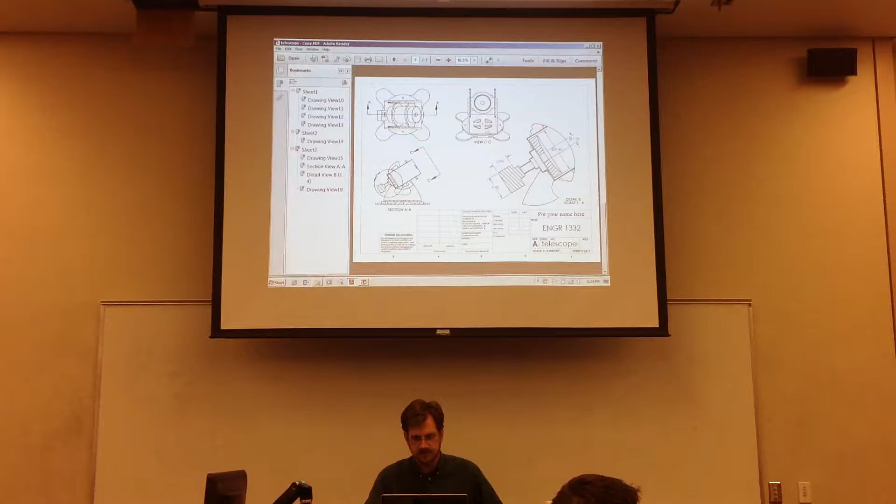So some of this is similar to what we did last week or a couple weeks ago. A couple things here are new. So we'll show you the steps that you need to create this drawing.

Okay, so then you're also going to create 2 different configurations of this assembly in one assembly file. Okay, one of them for direct viewing, the other one using a Canon camera. We'll talk more about that. Then we're going to adjust the parts as necessary to let the camera mount version pivot a full 360 degrees without interfering with the base plate.

And then we're going to save the assembly as a part file. Okay? So you're used to saving the assembly file, but we're going to show you how to take this assembly and save it as a single individual part file, an SLDPRT file. And then finally, we'll take that part file and save it as an STL file, which is the kind of file that you use with the 3D printers. So you could actually go and print this if you wanted to.

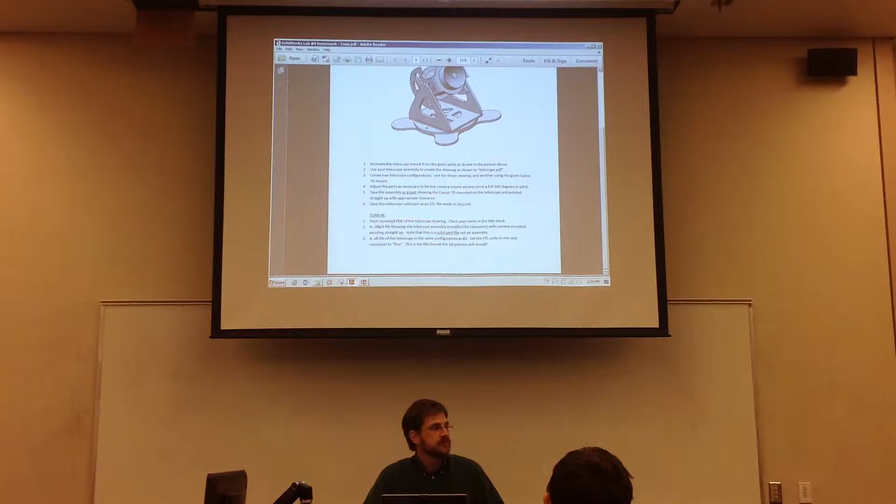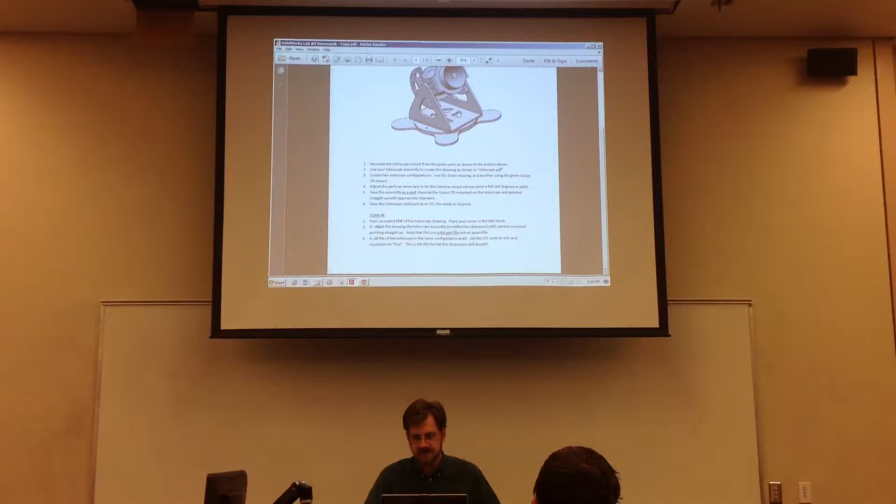So what you'll turn in is 3 files. One of them is going to be your PDF of the drawing. Then you're going to turn in your SLDPRT file, where you save this assembly as one single part. Okay? Again, note that this is a solid part file, not an assembly file. And then finally, you're going to turn in your STL file, which is the format that the 3D printers accept.

So with today's class, you'll know everything that you need to know in order to go actually start using 3D printers and taking your models, sending them to the printer. Okay, so that's an overview of what you're going to be doing this week. And I went ahead and put the assembly together since there's nothing new there. I don't want to waste your time watching me do these operations that you already know how to make. So let's just open this up.

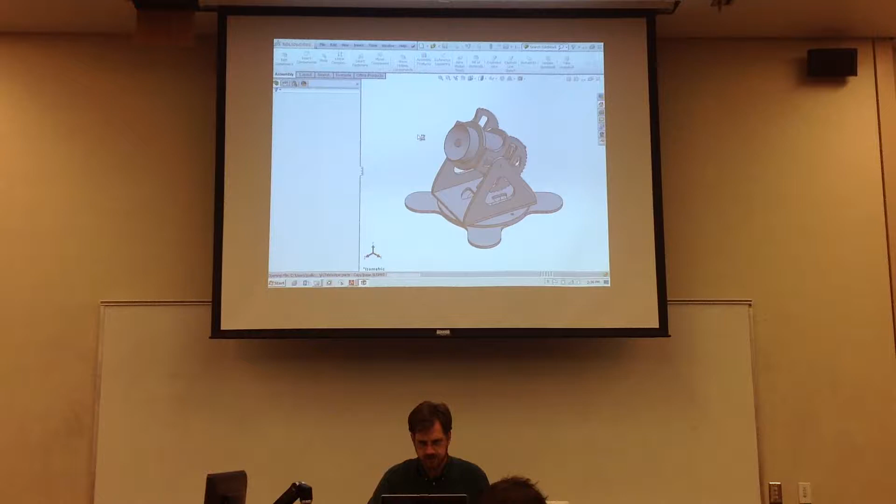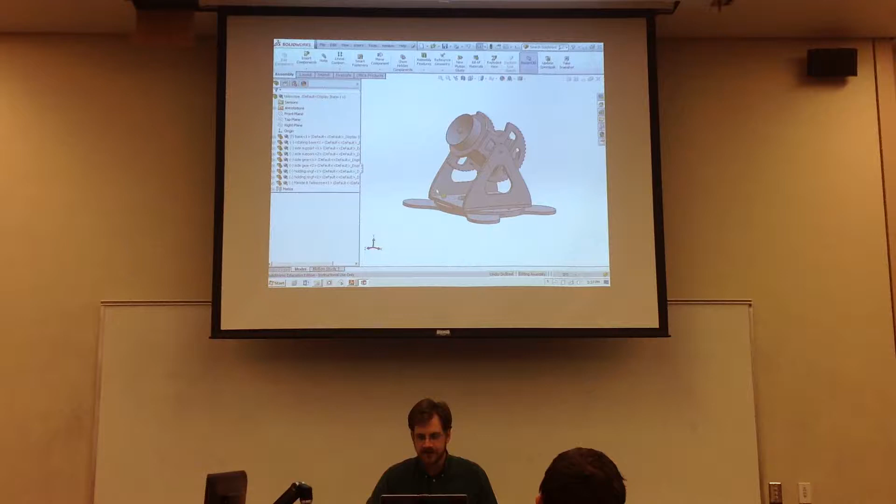Okay, so here's the telescope. And when you've got it all put together, it should be able to rotate like that. So you can rotate around to point it in different directions. And also, if I temporarily fix that rotation, you should also be able to pivot it up and down to change the angle at which it's looking.

So now if I look at, say, a top view, what I want to do is have this rotation oriented in a way that it's going to be kind of facing straight down. So that if I looked at the right side view, it would be just, I'd be looking straight at the side. I don't want it rotated at some odd angle.

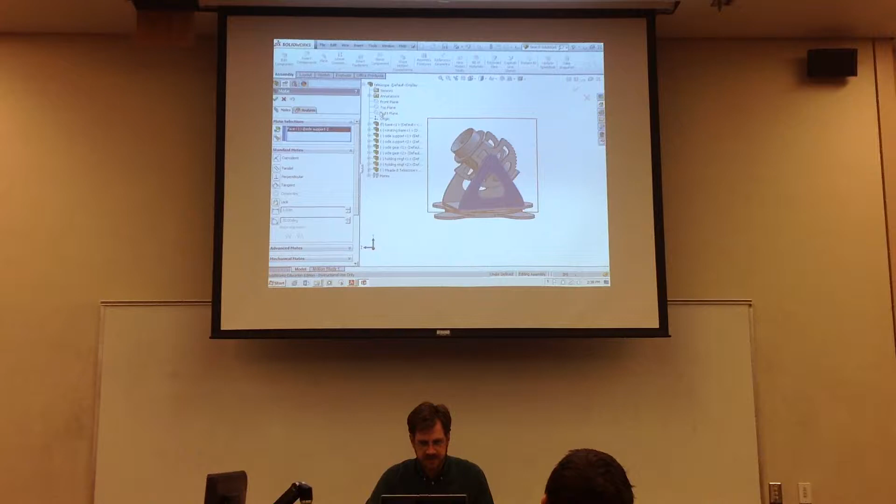So the easiest way to make that happen is to go ahead and simply mate one of these side plates to be parallel with the right datum plane. So we can go to mate, choose the side plate, choose the right datum plane. They don't need to be coincident, they just need to be parallel. Okay?

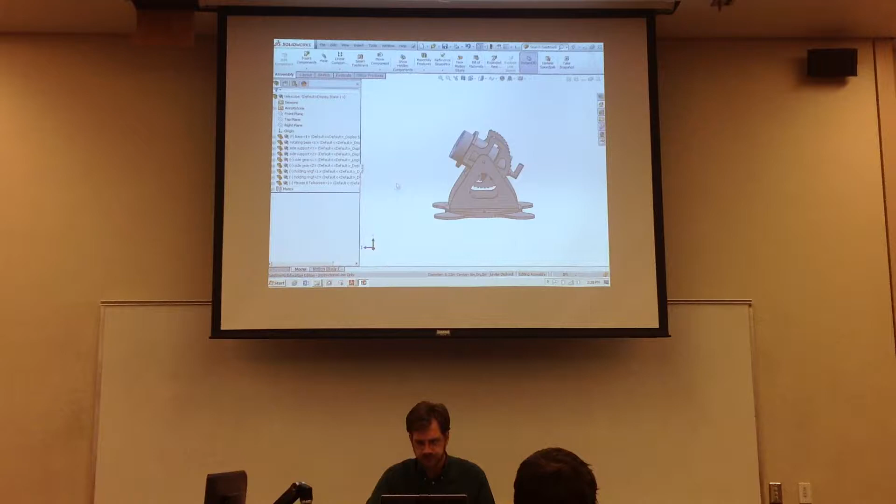Okay, so this is the direct view version of the telescope. So this little eyepiece, you put your eyeball right here, you look through the telescope. The light coming in reflects off of this main mirror at the back, reflects back to this secondary mirror at the front, and then reflects off of that, goes through some lenses of the eyepiece, and comes up here to where you're looking in through the eyepiece.

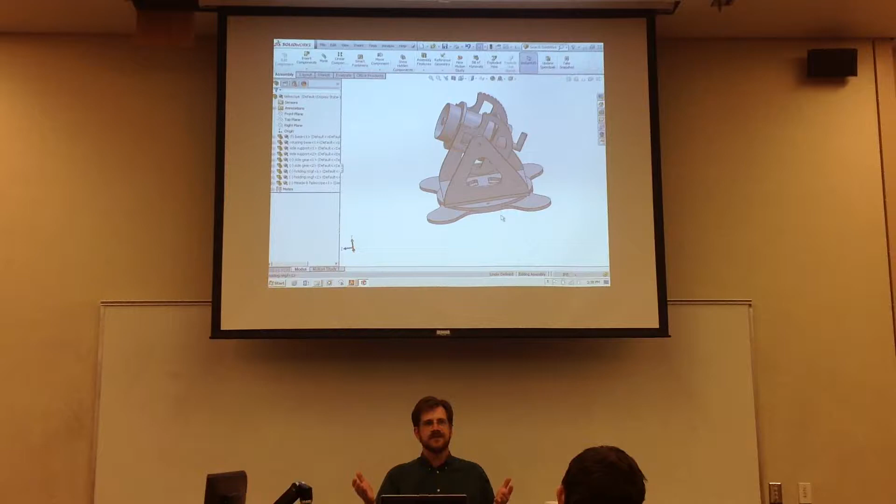Okay, so one of the things you saw in the drawing was that we're going to create an exploded view of this telescope, where all the parts are separated. You know, you've seen these lots of times. Anytime you buy something that you have to put together yourself, they usually give you an exploded view to show the locations and... actually define that exploded view as a configuration in the assembly model. So we need to do that before we create the drawing.

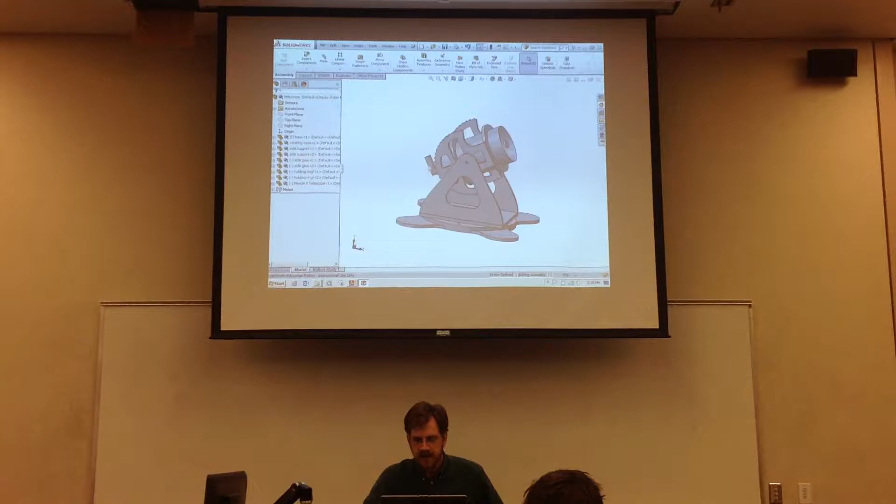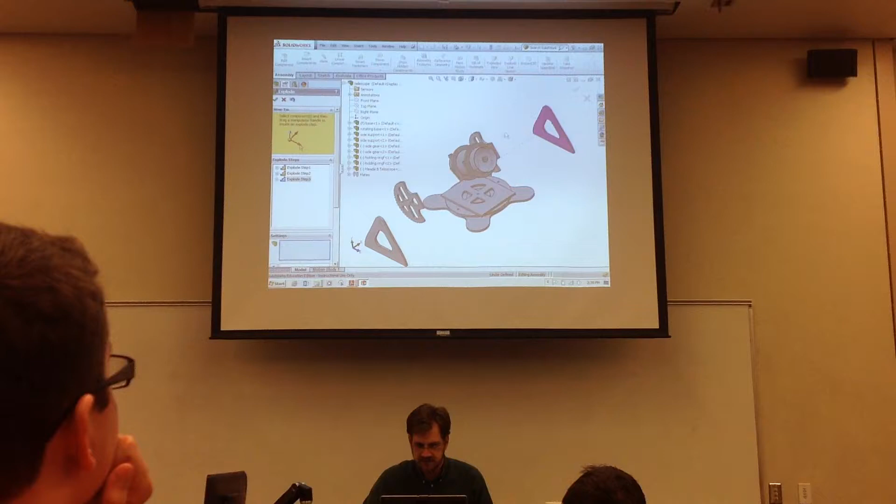Defining an exploded view is actually pretty easy. On the assembly tab, you've got a button right here for creating an exploded view. You just click that button, and then you can click on a component in your model, and a triad, these three handles will pop up, and you can click on any one of these handles and simply drag the component in that direction. So for example, I can click on that red handle and drag the side plate out to the side. Then I click on the gear and slide it out to the side, do the back side plate, side gear. So this is very straightforward.

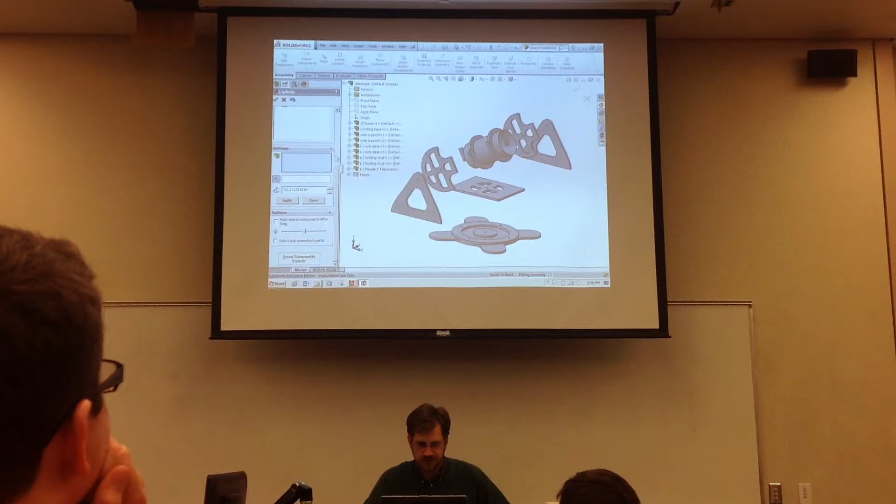We can drag components vertically as well. Drag that down. And you'll see each time I drag a component, it's defining that motion using an explode step here. If you wanted to get really precise, you can put in precise distances right down here, but usually, for our purposes, it's good enough to just position things, make them look good by dragging them on the screen.

Now, if we wanted to drag one of these holding rings, suppose we want to drag it along the axis of the telescope. That's the direction that makes the most sense, but none of our triad arrows are lined up in the correct direction. What you can do is right-click on that blue dot in the center of the triad and say Align To, and then you can click on some other surface and the triad will rotate to be normal to that surface. So now we've got a handle oriented just in the right direction.

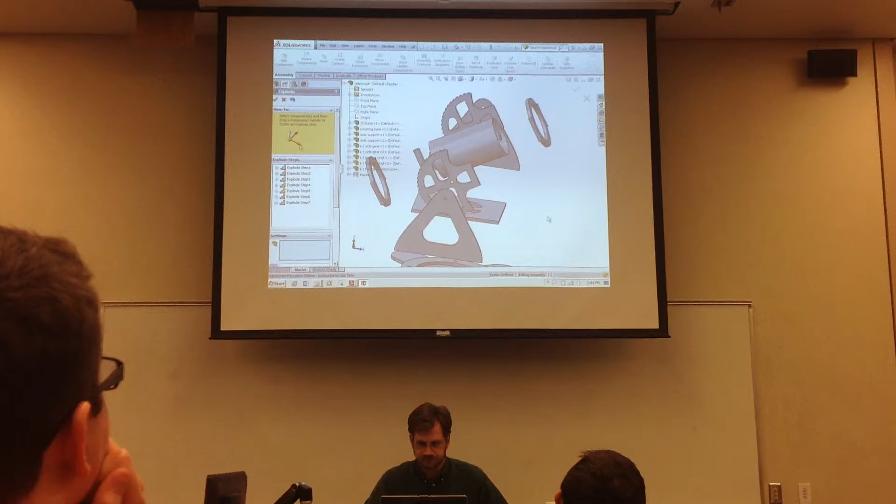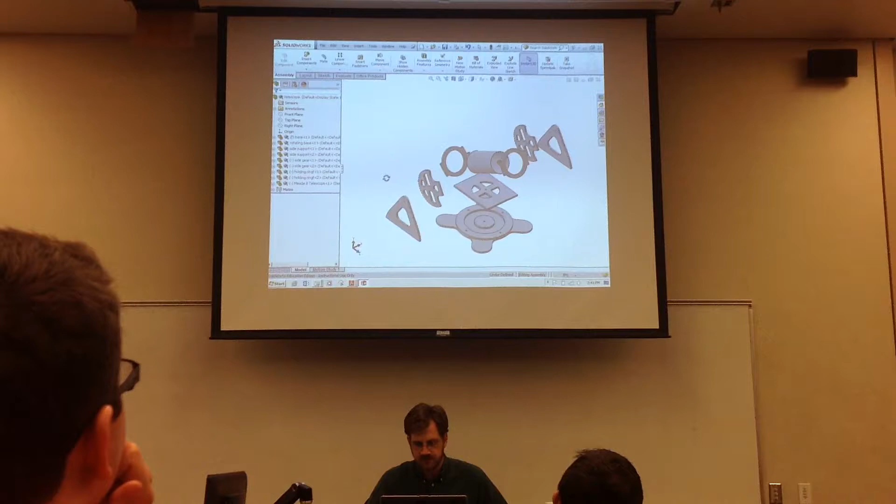We'll do the same thing on this back holding ring. Click on it, right-click on the blue dot of the triad, say Align To, and then click the front face of that surface. That rotates the triad, and we can drag that back. Okay. So once you get the components positioned the way you like, just go ahead and click the check mark, and you've now defined the exploded view of your assembly. That exploded view is saved on the Configuration Manager tab.

Okay, we've spent most of our time looking at the Feature Manager here, but notice there are 4 different tabs. We've got the Property Manager here, which we've seen, sometimes an Appearances Manager, but this third tab is called the Configuration Manager. And if we expand the default view, this is where that exploded view resides that I just created. So if we want to put the pieces back together, all we have to do is right-click on Explode View 1 and say Collapse. And it's back to the fully assembled version. If I want to explode it again, just right-click and say Explode.

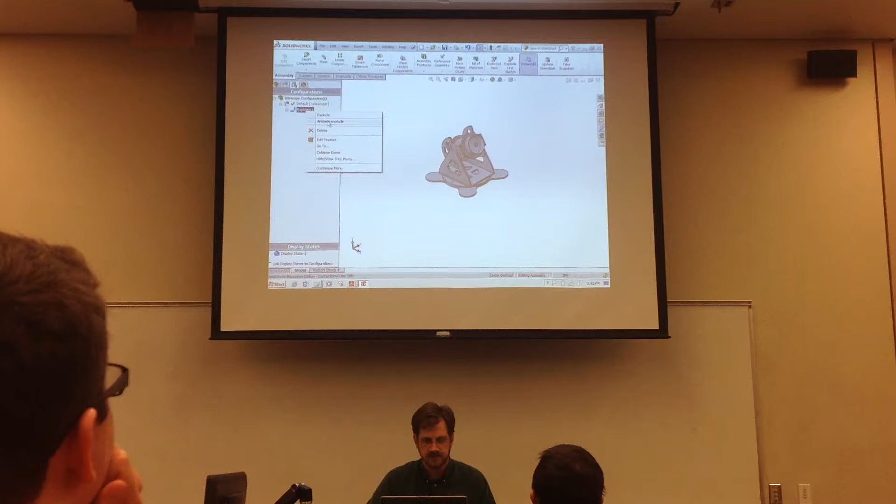Another thing that's kind of neat here is, if you right-click, you can animate the explode steps that you define. So click Animate Explode, and it will do those steps in the same order that you created them, and you could even save that as an AVI file or a movie file. You could put that into PowerPoint if you wanted to see your assembly being taken apart. It's just a movie file, completely independent of SolidWorks.

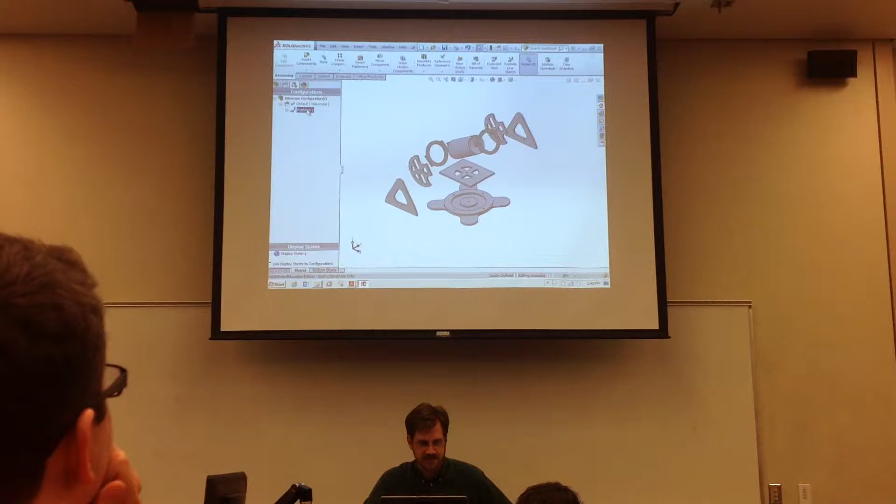You can also animate the collapse process if you wanted to show how it goes together. Just right-click and say Animate Collapse, and you can see all the parts going together. And again, just use the little Save button if you want to save that movie file.

Okay, so do you have any questions about defining the exploded view or anything we've done so far? I'm a little confused about what we were turning in. You said that we were turning it in as just a part file. Mm-hmm. So does that mean that we're going to take our assembly and just save that as one part? Right, and I'm going to show you exactly how to do that. Okay. But yeah, that's what you are doing. Any other questions?

Okay, while we're on the Configurations tab, this is a good time to talk about creating multiple different configurations of your assembly. A lot of times we might want to show our assembly in different states of operation, like if you're modeling an airplane, you might want to show it with gear up and gear down, or flaps up, flaps down.

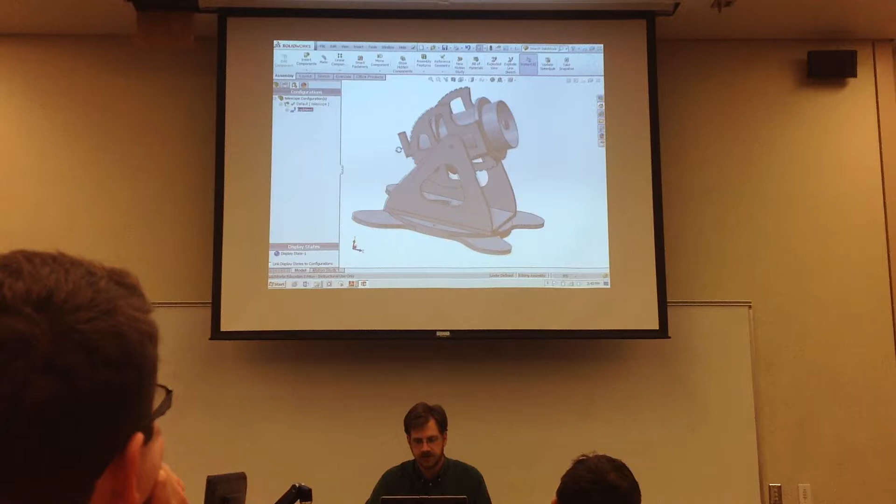You don't want to save a different assembly file for every one of these different configurations. We can create multiple configurations and save them all in one assembly file. To illustrate this, we're going to replace this direct view telescope with a different version of this part that has a little box on the back representing a Canon camera. So that'll be our camera view telescope.

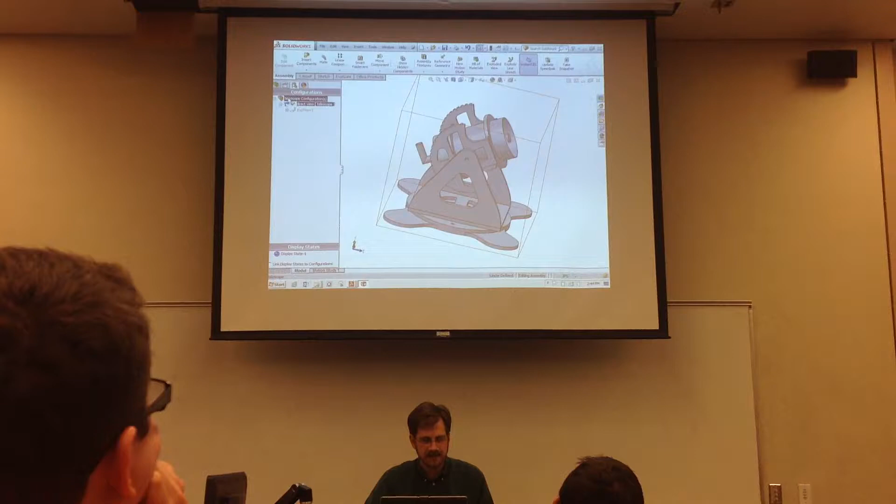The configuration we first defined is just called default, but let's call it something more meaningful. Let's rename that and call it direct view. To create a new configuration, I right click on the top level assembly and say add configuration. I can give it a name. I'm going to call this one camera view.

There are a few other options you can look at, but I'm just going to accept the default options as far as defining the configuration. Now I put this assembly into the state it should have for the camera view configuration. So I'm going to insert another component that you are provided on D2L.

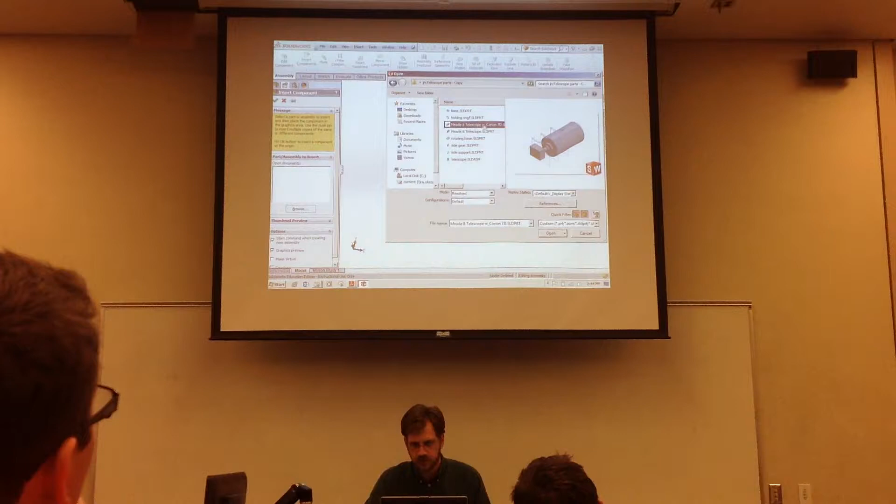It is the telescope with Canon part. So open that and place it in the assembly. What I want to do is replace this direct view telescope with this Canon camera telescope.

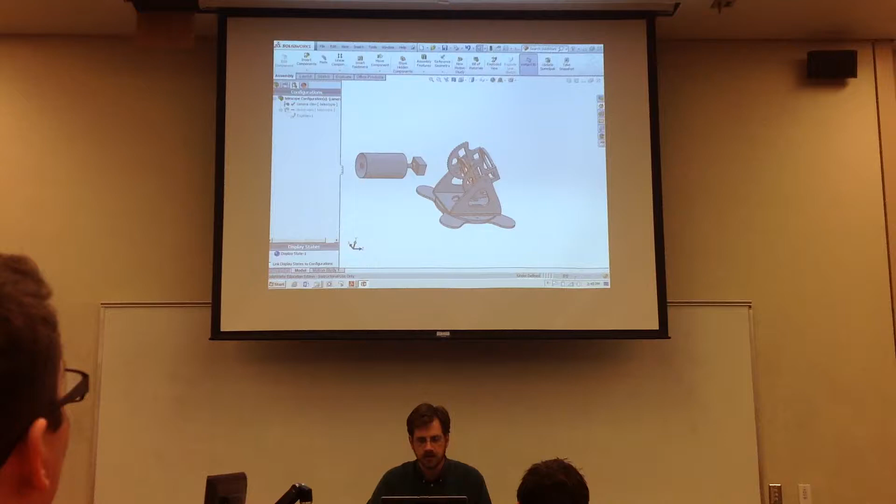I don't want to delete the original telescope though, because I still want that available for the other configuration. So instead of deleting it, you right click on it and simply say suppress. It hides it, but it's still in the model and all of its mates are still valid. If we go back to the feature manager, you can see anything you've suppressed will be grayed out like that, but you can always right click on it and unsuppress it to bring it right back into your assembly.

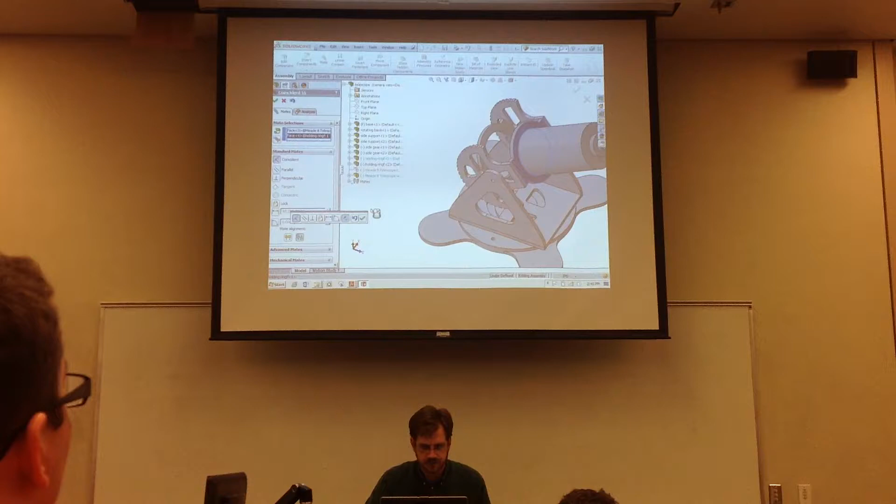So let's suppress that guy and then make this telescope into the proper position. We'll mate that surface with the inside surface of the holding ring, then do an offset from the front surface of the telescope to that front surface. Offset it by 3 inches, and flip the alignment.

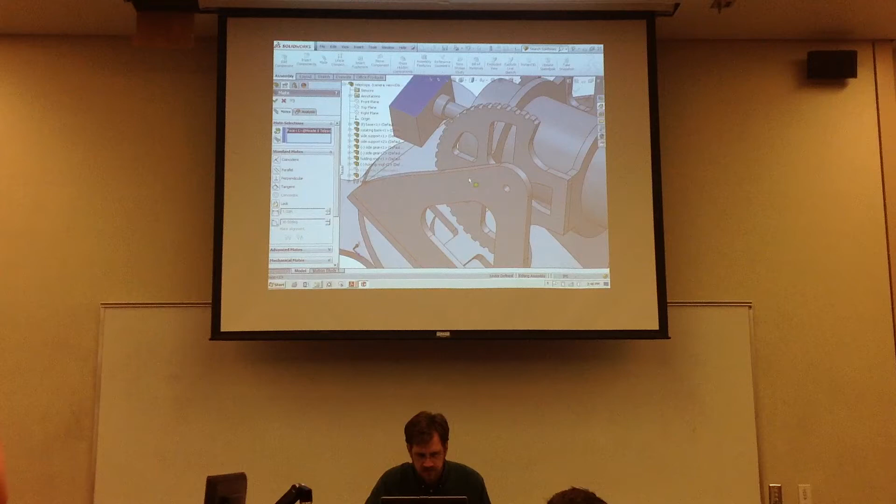And then the last thing I need to do so that it doesn't rotate anymore is make that surface parallel with that surface, and that'll fix the rotation. Okay, so now back on the configuration manager tab, this is defined as our camera view configuration.

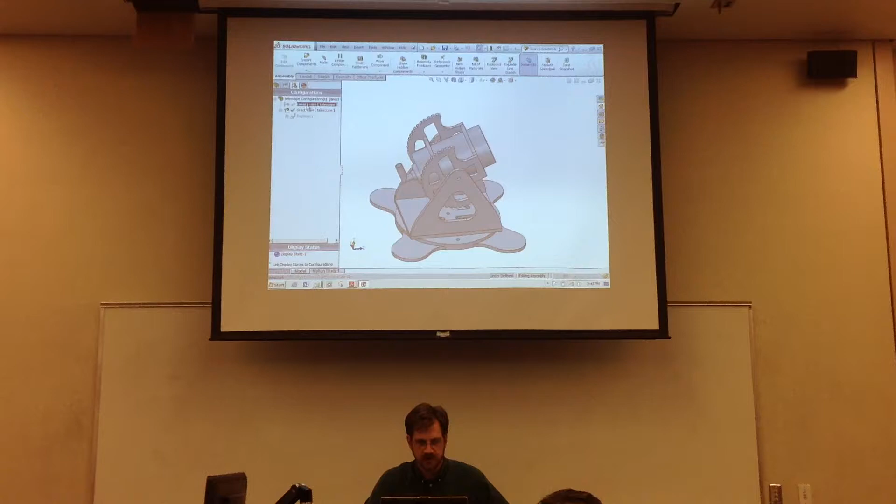If we double click on the direct view configuration, notice that configuration now has both telescopes in it, so we simply need to suppress the camera view telescope from that configuration. Just right click, suppress. So here's our direct view configuration, double click, and here's the camera view configuration. It's a very nice way to save multiple setups of your assembly all in one file, so you can quickly switch back and forth.

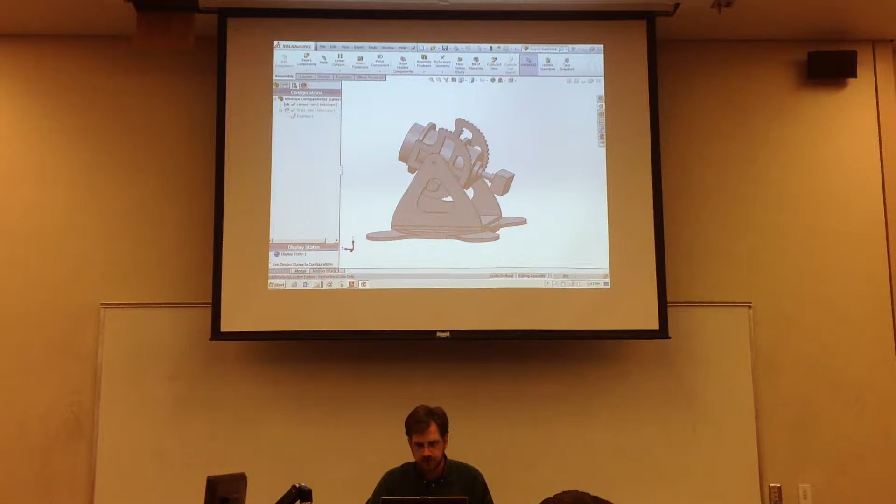Okay, so here's our camera view telescope, and suppose I take this and want to look straight up. Well, I just rotate this telescope to start looking straight up, and what's the problem we have? The camera bangs into the bottom of the base plate. This interference is pretty obvious, but certainly in assemblies you might have something that's just a very close clearance and you want to find out if it's actually going to collide with some other part.

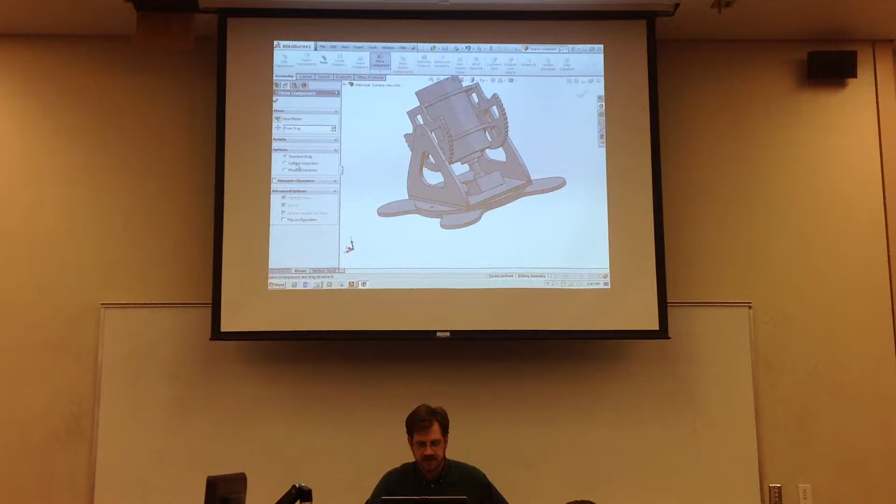Remember last time we looked at the move component button and used physical dynamics to try and model the motion of those gears. Well, another option you have there is collision detection. If I turn on collision detection, I'll choose to check all components and stop at collision, highlight faces, and have a speaker play a sound.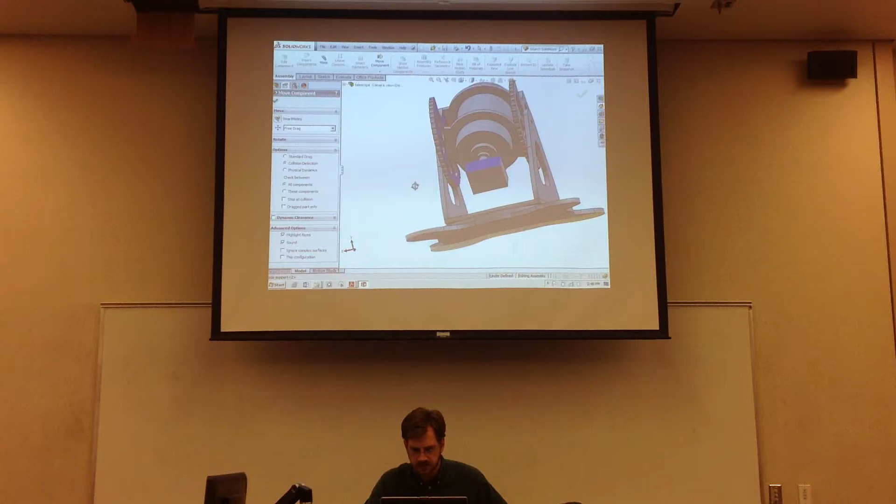But if I now click and drag this telescope, started like this... okay, that ring got messed up. I'm not sure how that happened. Let's fix that.

Okay, now go back to move components, collision detection, all components. So now if I click and drag on the telescope, when it reaches the point where it collides with the base plate, you'll see it stops moving and the base plate and the camera highlight to show where it collided. That's a nice, easy way to check for collisions.

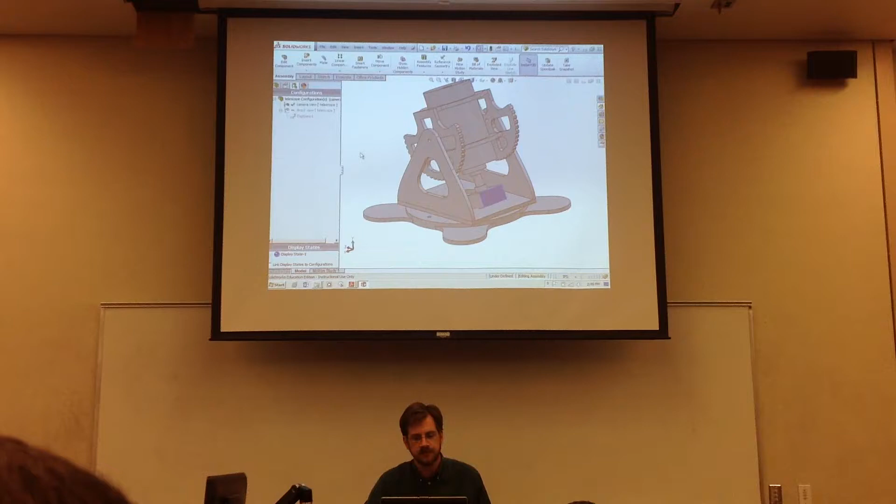SolidWorks can help you there. Now, as soon as I click the check mark and close that box, it goes back to the normal way where it doesn't care if it interferes. So that's just going to show you if things interfere, but then you have to go fix them yourself. Now, what would we do to fix this problem we're having with the camera?

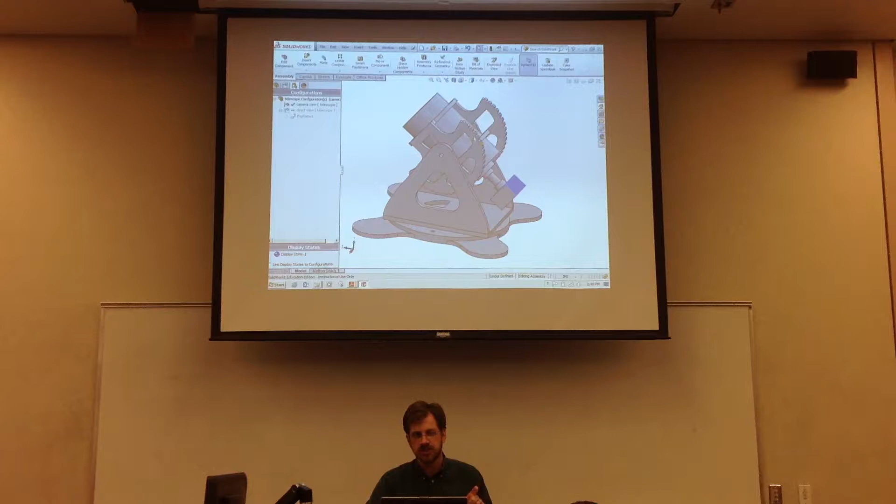Move the lens up, like shift the entire tube up through the rings. We could shift the telescope forward, although there's actually a good reason it's positioned where it is - to maintain the CG, the center of gravity of the telescope, right along the pivot axis. If we move it forward and the CG is up here, the telescope's always going to try to drop nose down.

So that's a good option, but what if we wanted to leave the telescope where it is? What else might we try? We could raise the height by adjusting the height of this part, right?

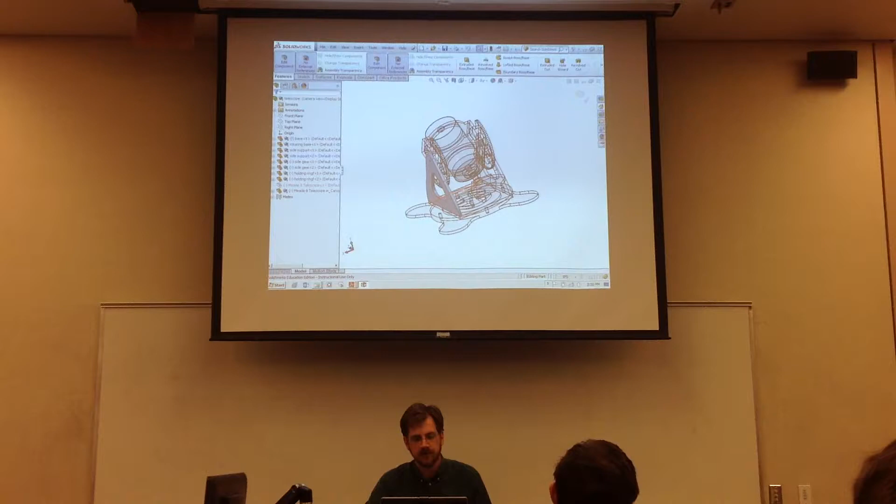So what we can do, if we want to modify one of these side plate parts, is right-click on it and go up to the shortcut button that says Edit Part. This may look familiar from when we were creating that tower for the wind generator and doing it in assembly mode. This is back into that same mode of operation, where the part we're editing is turned blue and everything else is somewhat transparent.

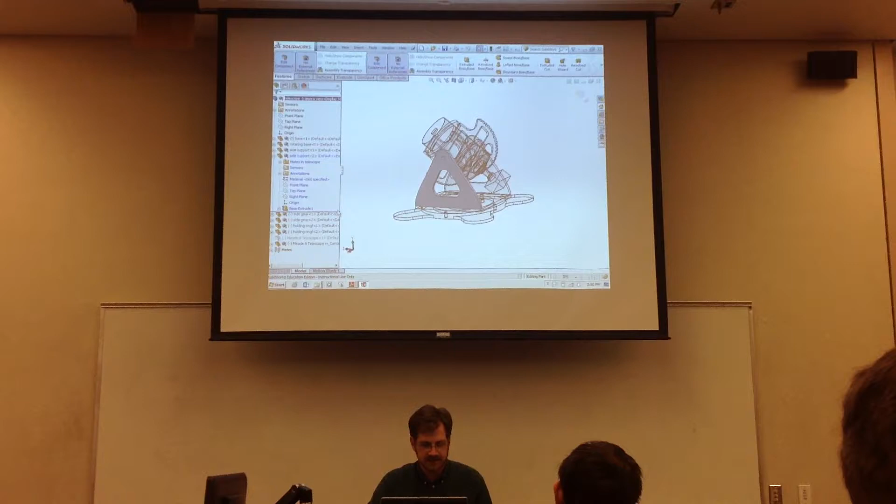This allows us, right here in assembly mode, to double click on the feature we want to modify. The current height is 14 inches - let's just try 18 inches. Regenerate the part. Okay, that looks pretty good, that gives us plenty of clearance down at the bottom. So we'll accept that as our new part, and now we've got plenty of clearance.

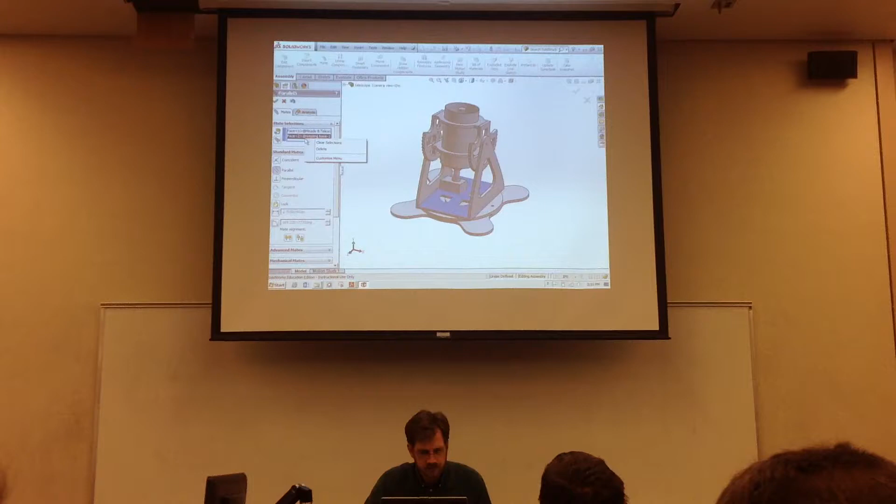So once you've modified the part, your homework assignment asks you to first point the telescope straight up so the clearance is easy to see. We can do that just by mating the bottom surface of the camera with the bottom surface here of the stand and making those parallel. Now you can clearly see we've got space between those components.

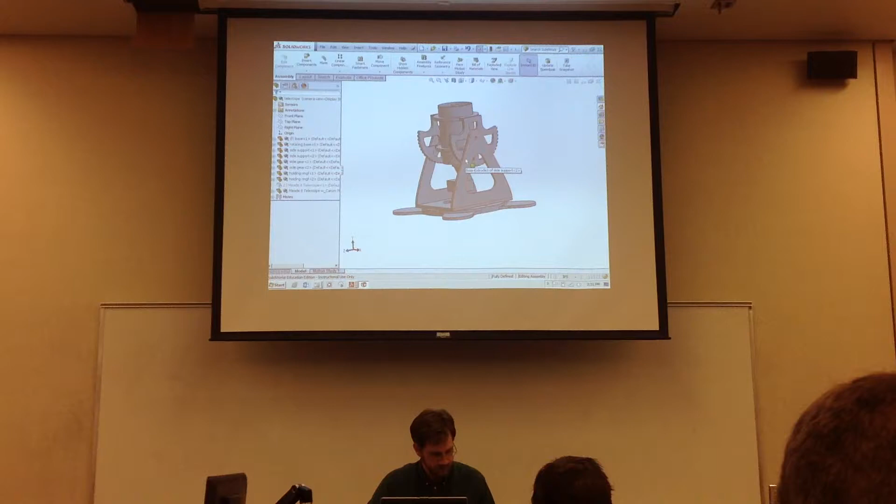In this orientation, now we want to take our assembly model and save it as a single part file. We do that by going to File and Save As, and we can change the Save As type from assembly to, in this case, the part file. Choose SLD PRT. Now what you should do here is choose all components.

I'm going to omit that step first to show you what happens if you forget to choose all components. If I just change it to part and put it on the desktop and say save... now let's go to the desktop and open that part.

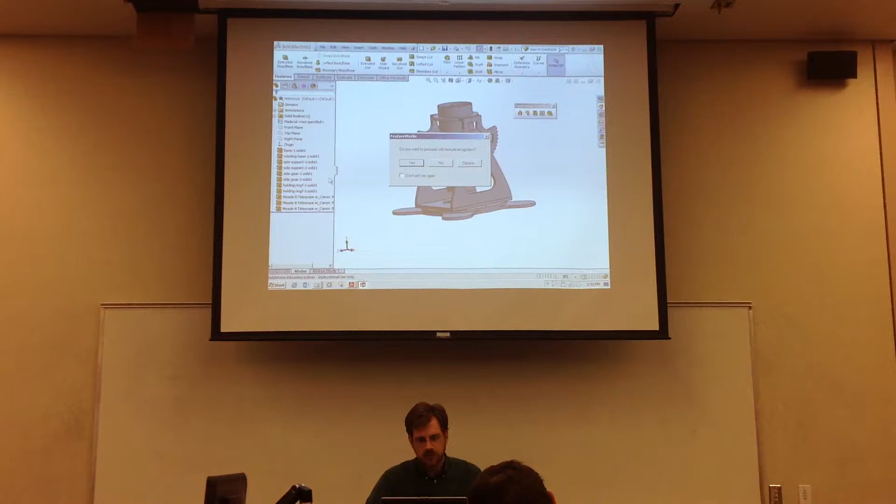It asks, do you want to proceed with feature recognition? What's happening is, when I save this assembly as a part file, all the different components now are what's called dumb solids - they don't have any real feature information in them anymore. It doesn't know what's an extrusion or a revolve or a sweep or anything like that. This feature recognition is SolidWorks saying, I'll try to figure out how these parts were made if I can.

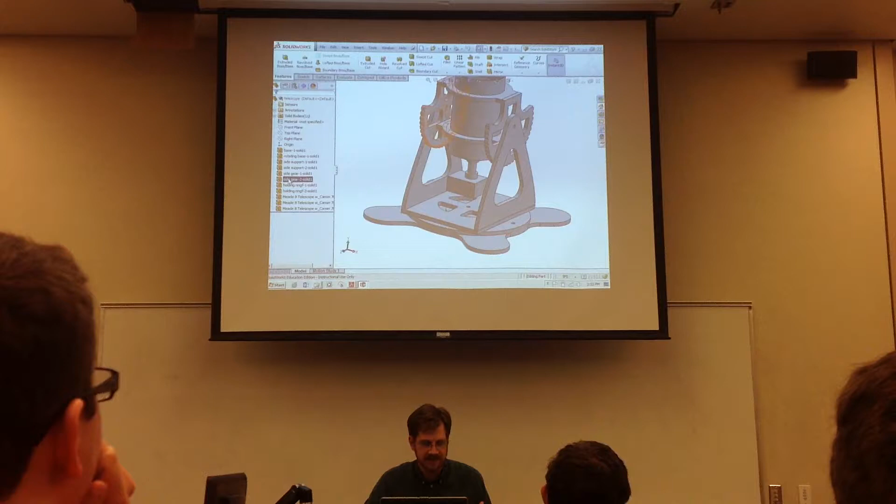If something is just a cylinder, SolidWorks will probably figure out it could make that as a circular extrusion, and apply that operation, inferring that's how the part was made. Sometimes it works okay, but usually I just tell it no, don't proceed with feature recognition. So you still get the parts listed, but again, there's no feature information in them - you can't expand these and see the extrusion or cuts or anything else that made those parts. They're just dumb parts.

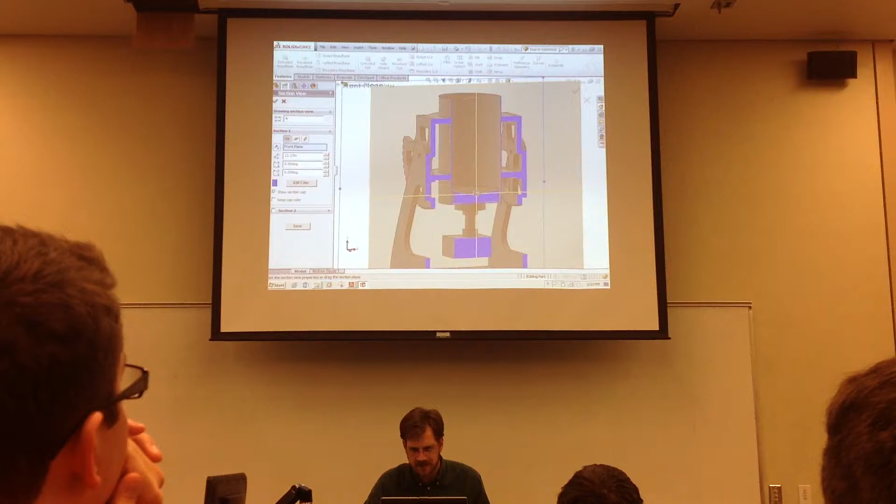Now, in spite of what I told you a moment ago, I think this actually worked okay. If I do a section view, okay, yeah, this actually did just what it was supposed to do, which I didn't think it would do if I didn't choose all components. But you do have solid material here, which is shown in blue, and this would probably be okay to print. Normally, if you forget to choose all components, what SOLIDWORKS does is not even recognize the solid material, it just copies the external surfaces of each thing you see here, so you don't have any solid material in your model, which would make it impossible to print.

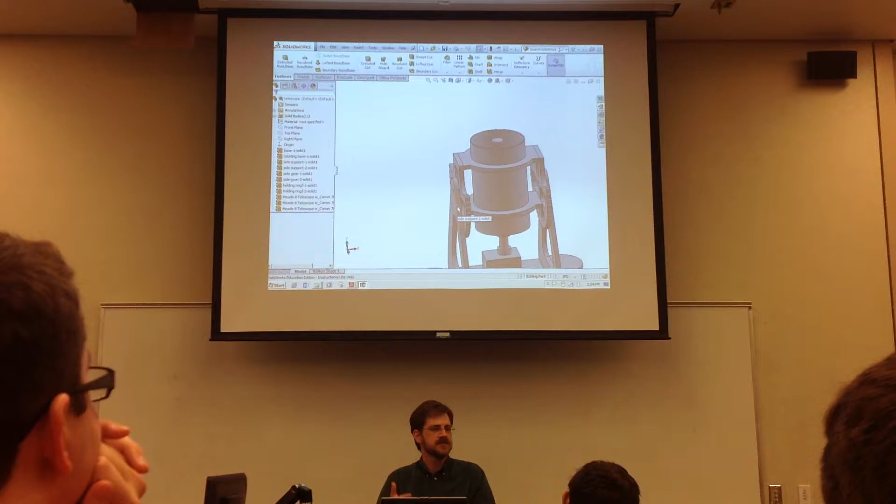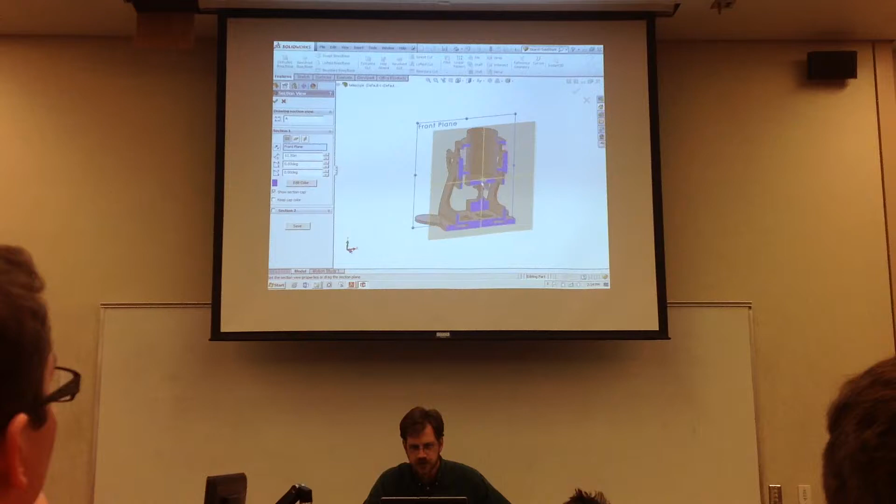So just remember, when you're in the assembly and you're doing a file, save as, part, just to be on the safe side, do go ahead and click the All Components button. That way it'll save the solid material like it should. But anyway, now we've got our telescope model assembly saved as a part file.

And the next thing that you're asked to do in your homework is save this as an STL file, which is the actual file type that you would send to a 3D printer. So to do that, you just go back to File, Save As, change the Save As type to STL.

Now this one I know is important. Make sure you click on the Options button and make sure that your units are set to millimeters and your resolution is set to fine. By default, it usually comes up as coarse, which means circular features aren't going to look as circular. Like you see here, it's going to approximate a circle just with straight lines, and it's not going to be very smooth. If you go to fine, it does a better job of approximating curved features.

It's still doing it with lines. If we zoomed in here, you see a bunch of little straight lines, but it's got a finer resolution, so you're going to end up with a smoother, better result. So make sure you choose millimeters for units and fine for the resolution. And then click OK, and click Save.

Okay, so this now is the STL file that it created. And you can see what it's done is replace the solid geometry that we had with a bunch of triangles. This really is just a point cloud of individual points with all their X, Y, and Z coordinates, of each node or each vertex of the triangles that you see here. And you can see with the fine resolution, places that have curves have a lot of small triangles, and places that are just big and square and blocky, like this camera, have relatively few triangles.

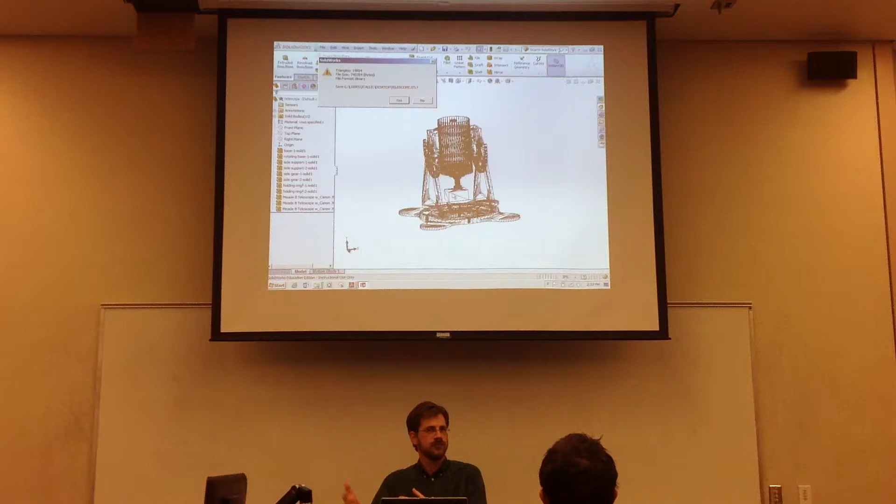But if that happens, there's a really nice resource that's available for free, and it's called Netfabb. Marker. So write this down in your notes. Even if you're not on the 3D printing subgroup for your project, this is still good information to know.

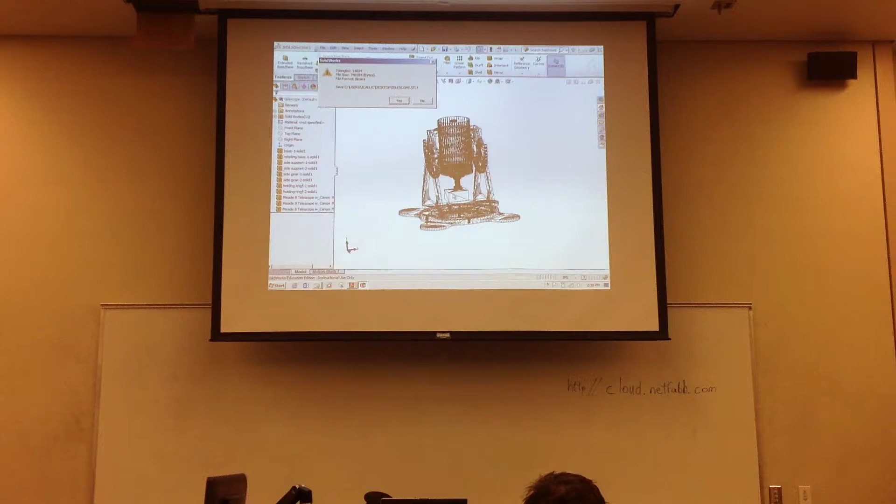cloud.netfabb.com, HTTP. This is a cloud service that you can use, and it's free. All you need is a Microsoft login. But what you can do is take an STL file that you generated in SOLIDWORKS, and if it's got problems, if it's got holes in it, you can upload your bad STL file to this site. Their software will analyze it, identify the holes or other problems, and fix it, and you just download a new repaired version. So cloud.netfabb.com can help you fix your STL files if SOLIDWORKS does not generate it correctly for you.

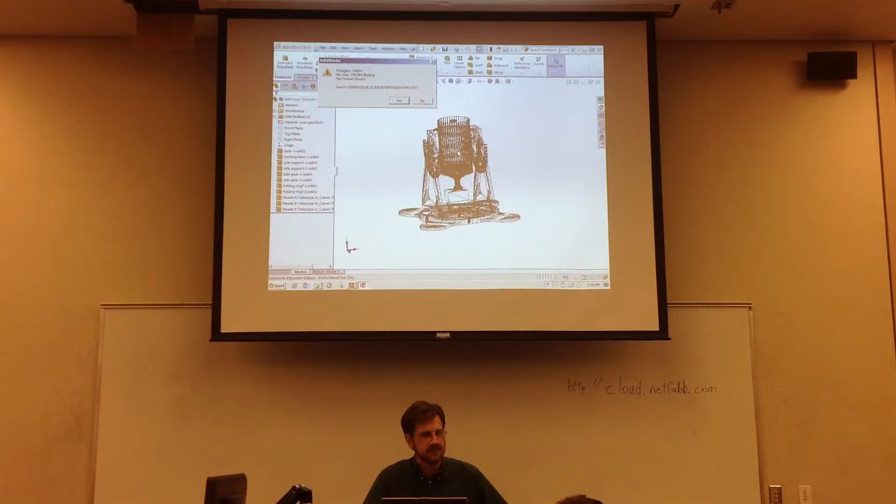Okay. But anyway, that's what the STL file actually looks like. And that's what you would open in the Repetier-Host software on the 3D printer computers, and you would start working directly with this file right here.

Okay. So for your homework, just remember you're going to turn in your solid part file version of this telescope, and also the STL file that I just generated, along with the PDF of the drawing, which we'll talk about next.

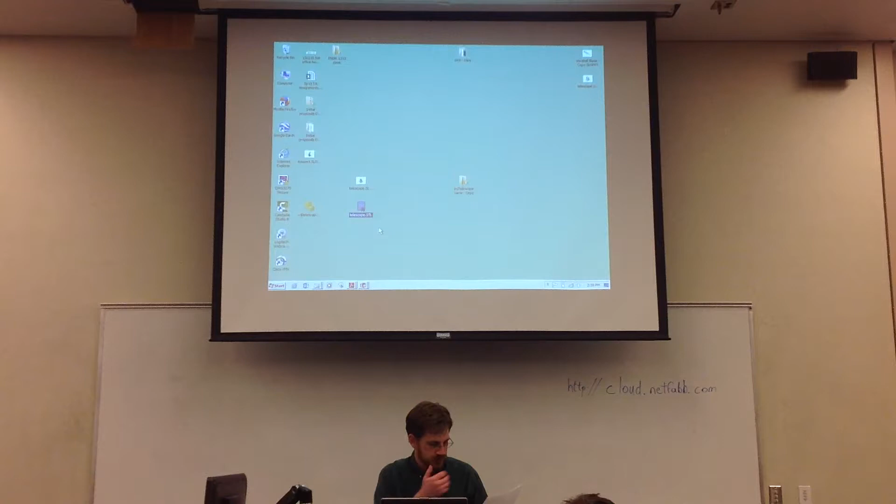Okay, so do you have any questions at all about any of the stuff we've done here in the assembly before we take a look at the drawing? Exploded views, multiple configurations, modifying parts in the assembly mode, saving it in different versions. From our single part, can we still look at the exploded view and the different variations of our configurations? Not from the part file.

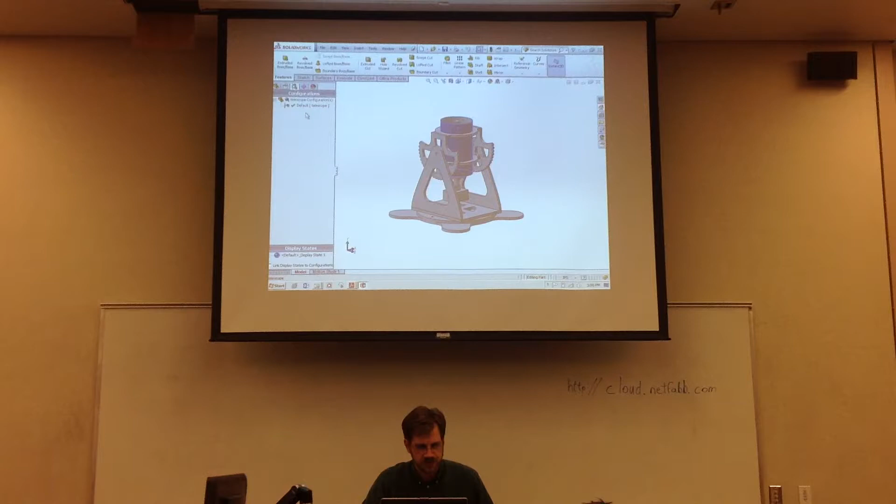When you save it as a part, pretty sure you don't have any motion in it anymore. Your configurations are just what you see on the screen. So the exploded view and those different configurations, you have to have the assembly file for that. Okay. Good question. Any other questions?

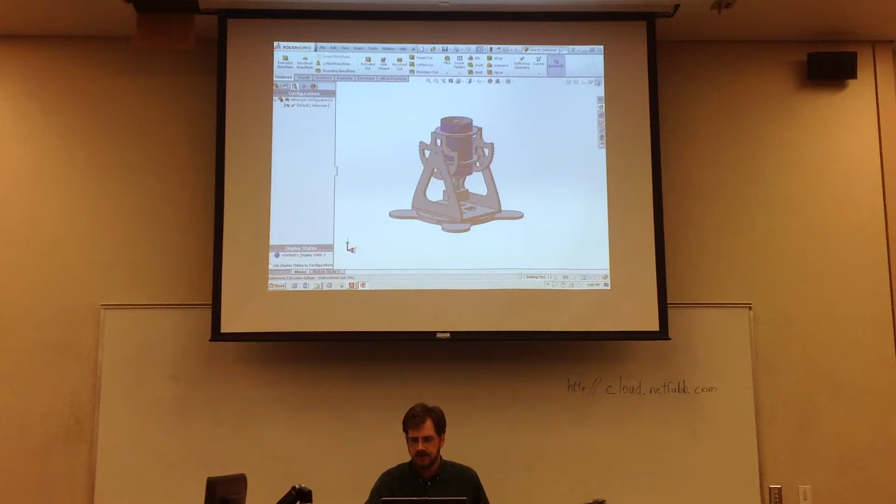Let's close that one. Let's see. I'm going to go ahead and put that assembly back to the way it was for purposes of the drawing. And okay.

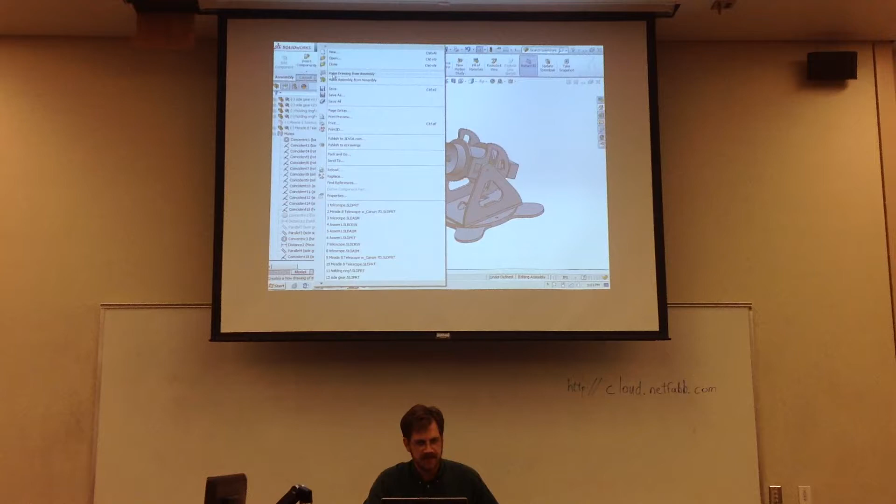Okay, so now we want to show you anything that you don't already know to produce this 3-page drawing of your assembly. Now, to start the new drawing, we could just go up to File, New Document button, or another option you have is to go to File and say Make Drawing from Assembly, and it will go ahead and start your drawing. You can say ANSI Landscape. These options are fine, and it knows what model you're working with.

So, of course, for sheet 1, the easiest thing to put in those 3 different views would just be to do a standard 3 view, say check mark, and it throws the 3 views in there for you. Now, these are smaller than what you want in your PDF. This sheet scale is 1 to 20. How do we change the sheet scale if we want it to be something larger? Remember? Okay, right click on the sheet, go to Properties, and we could make it 1 to 12 right there.

Okay, and then, let's see, what else? On sheet 1, you're going to put in some dimensions. You remember, just use Smart Dimension to do that. You're going to put in an isometric view. That's just done using the Model View button to put in an isometric view.

How do you put your name in the title block? What do you need to do to put that in? Very good. Right click and say Edit Sheet Format, and then you can double click and you can type whatever you need in the title block. Push that button to go back.

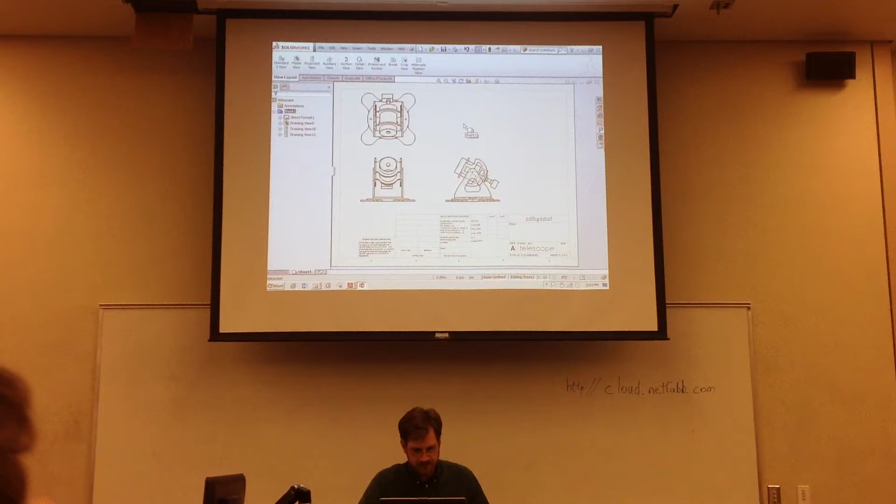Also notice that you want the hidden lines to be shown in this right side view. Okay? So in our drawing, how do we make the hidden lines shown for this view only? To change the display state, we just click on it and go to this option to show hidden lines. Okay, so that's what you would want for your right side view. Okay, so I think you know everything that you need to complete sheet 1.

So now let's move to sheet 2. That's where we put in the exploded view and the bill of materials. Now, first thing you need to know is how do you add another sheet into your drawing? And I promise this is something we always require on the final exam in here, is to make a multi-sheet drawing. So this is an easy 10 points on the final exam. Remembering how to create a second sheet in the same drawing.

You can do it just like you do in Excel. You go down here to the bottom and click on the little tab that says Add Sheet. Okay, that's one way to do it, and that brings up a new blank sheet 2. Or you can right-click on your sheet in the model tree and choose Add Sheet from there. Either way. Now, for sheet 2, we want to turn off that title block so that we have more room. How do we turn off the title block in our drawing on this sheet?

How do we turn off the title block? You remember where that command is found? Anyone? Anyone at all? Okay. Right-click and go back to Sheet Properties. This is also where we change the scale, but just uncheck that box that says Display Sheet Format. Okay, say OK, and that turns off the format on that sheet, but sheet 1 still has, just like we left it, just like we want, the title block.

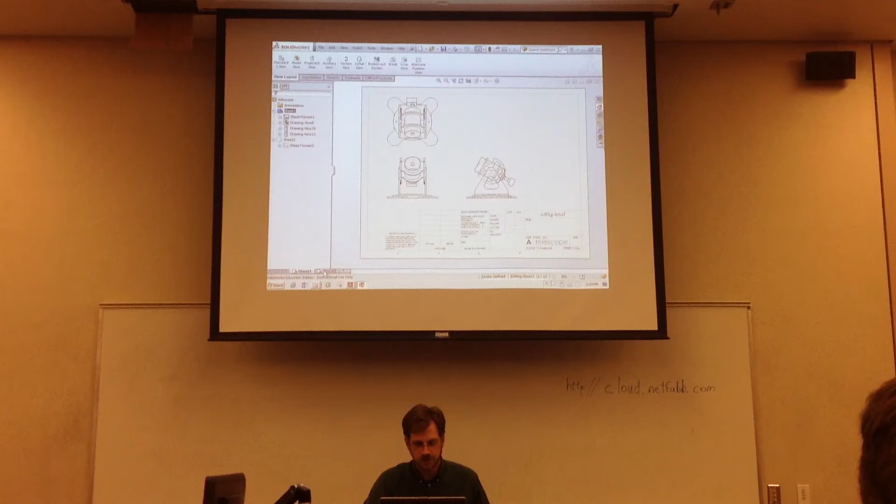So for sheet 2, now we want to put in that exploded view. So you can go to the Model View button. Yeah, we want the telescope model. Let's turn on the preview checkbox, and we want to put this in as an isometric view. So, okay, now notice one of the options we have in our Model View Property Manager now is to choose what configuration we want to show. We can do the camera view configuration, or we can do the direct view configuration, because both of those are defined in our assembly.

And if I do the direct view configuration, notice it also gives me a checkbox now to say show in exploded state. I don't have that checkbox when I did the camera view because I was actually looking at the direct view when I defined the exploded. So here's a hint for your homework. Since you want the camera view as the exploded view, make sure this is the configuration you're looking at when you define those explode steps. Make sure you've got the camera version in your model. Because if you do, then you'll be able to just choose that configuration, click the checkbox that says show in exploded state, and then click to place it, and that's how you get your exploded view.

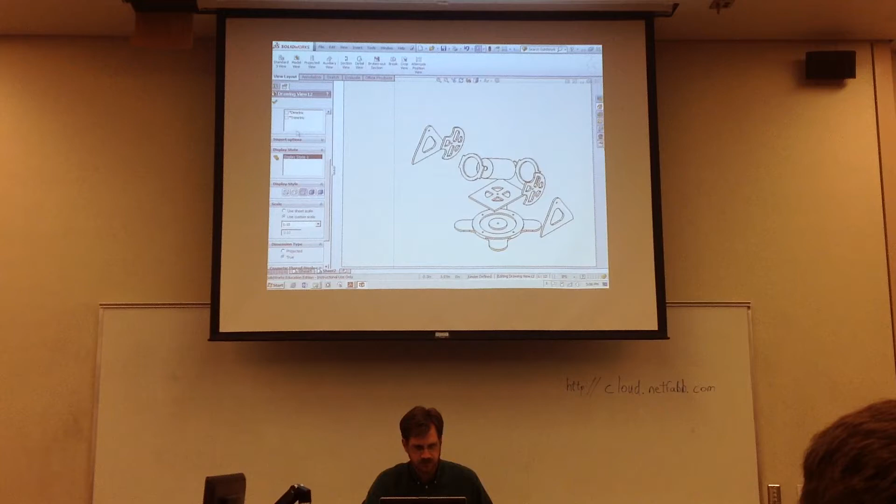Okay. Let's make that maybe 1 to 10. We'll make it a little bit bigger. Okay. Now, it comes in oriented not in the right direction. I'd like it to be pointed around the other way. So what we can do is use this button right up here that says 3D Drawing View. If I click that and then click the Drawing View, it lets me rotate this using the middle mouse button just like we're used to rotating our model. So we can reposition this into any orientation we want to. Okay? Okay, so that's how you put your exploded view into the drawing.

Now the next thing we want to do is generate this table. This is called a bill of materials. And we do that by going to the Annotations tab and going over here to the right where it says Tables and choosing Bill of Materials. Okay? Sometimes people just call this a BOM for short. In industry, sometimes you'll hear this referred to as a BOM.

I remember when I went to my first engineering job at Sandia National Labs, one of the senior engineers handed me a big stack of drawings. It was like 50 sheets. It was a drawing package for a space satellite that we were working on. And he handed me this drawing package and said, here, go create a BOM for this. And I got excited because I thought, that sounds like fun. I thought we were going to blow something up. But he was actually just talking about one of these bill of material tables. And I had to generate this manually. There were thousands of parts in this thing, and that was not fun at all. But with SolidWorks, it's actually fairly automatic. If you just click the right button, SolidWorks fills in all this information for us.

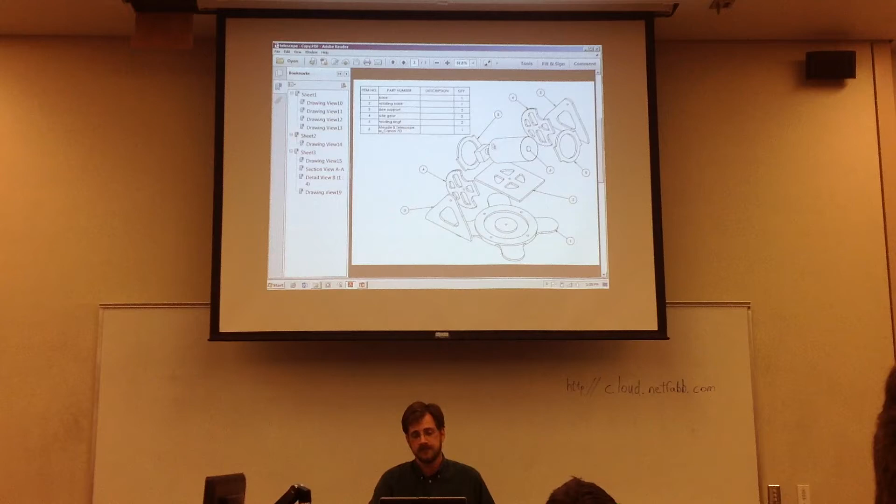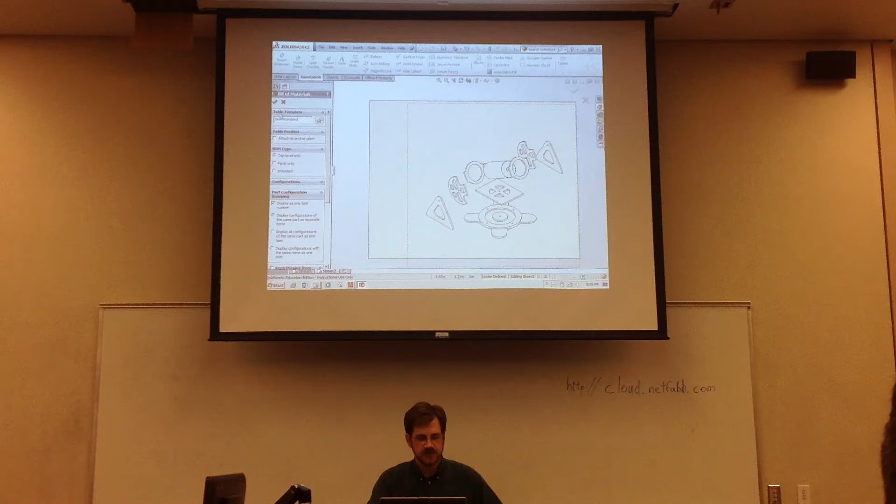So in SolidWorks, we go to the Annotations tab, go to Tables, and choose Bill of Materials. It says to select the drawing view that you're going to generate the table for. Just click on your exploded view. Now there are a lot of options that come up that give you control over the appearance of the table. We're not worried about any of these today. We're just going to accept everything as the default option. Just click the check mark, and the table is created for you.

It's just following your cursor around, waiting for you to click and place it. I'll put it up there at the upper left. And then you can resize these columns if you need to. Like in this upper right box, I really just want that to say quantity. I don't want the default part in it. So just double click that and we can delete that text.

But all of this is created automatically. It identifies the name of each one of these parts, just whatever file name I saved it as, and identifies how many of that part are in the assembly. And if there was a description that I saved with the part, that will be filled in automatically as well. So that's how easy it is to create the bill of materials for your assembly in SolidWorks.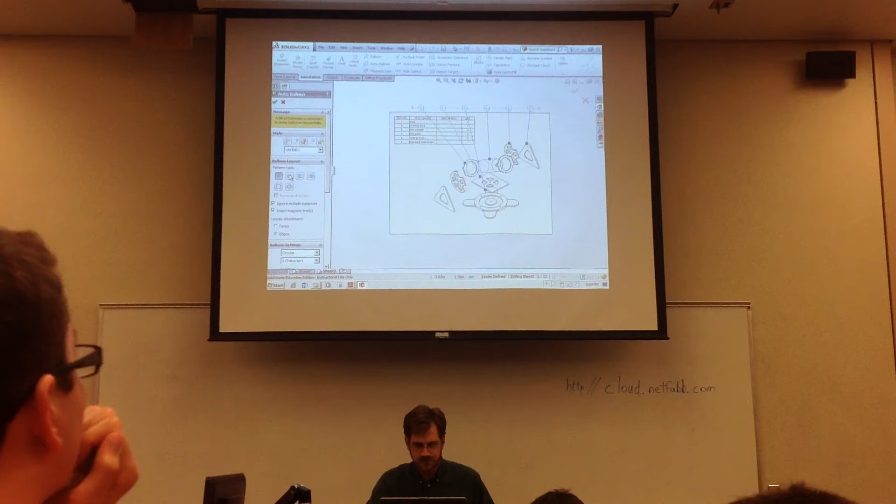Now the last thing we need on this page is the balloons that identify which item is which from the bill of materials. And again, that's fairly automatic. It's just a matter of remembering which button to click. On the annotations tab, we use this auto balloon button to create those item numbers. So click auto balloon. You can choose different layouts if you want them all down the left side or around and all surrounding.

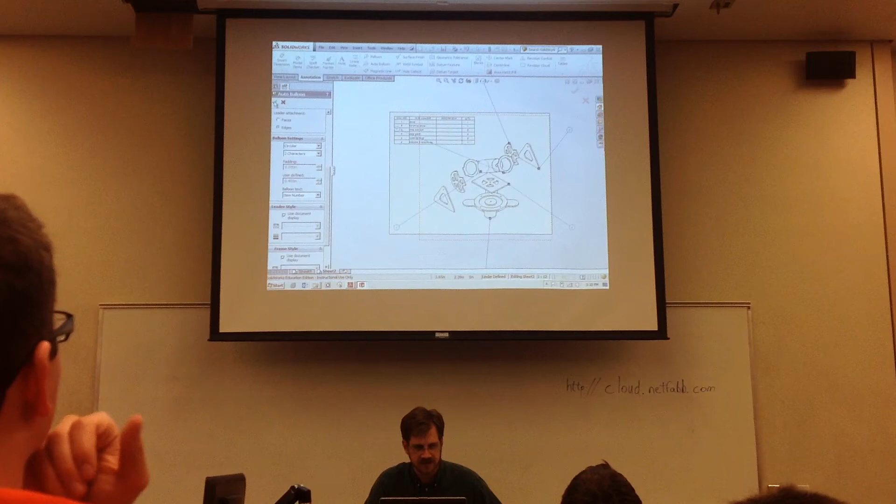You can choose whether or not you want it to ignore multiple instances, like where you have two of the same part. Do you want each part labeled or just one of the two parts? There's a whole bunch of options we're not too worried about. Just accept the defaults, and then you can click and you can reposition these balloons just by dragging them around and putting them wherever you want those to be.

So, now in this case I did tell it to ignore duplicate instances. So like this side here is identified as part number 4, which corresponds to the bill of materials. All the numbers match what's in the table. But this side here didn't get labeled.

If I want to go ahead and label this myself, I can do that manually using the balloon option button here. Just click and then just click on whatever point you want to label, and SolidWorks goes ahead and creates the correct number to match the bill of materials table. So you can do that as well.

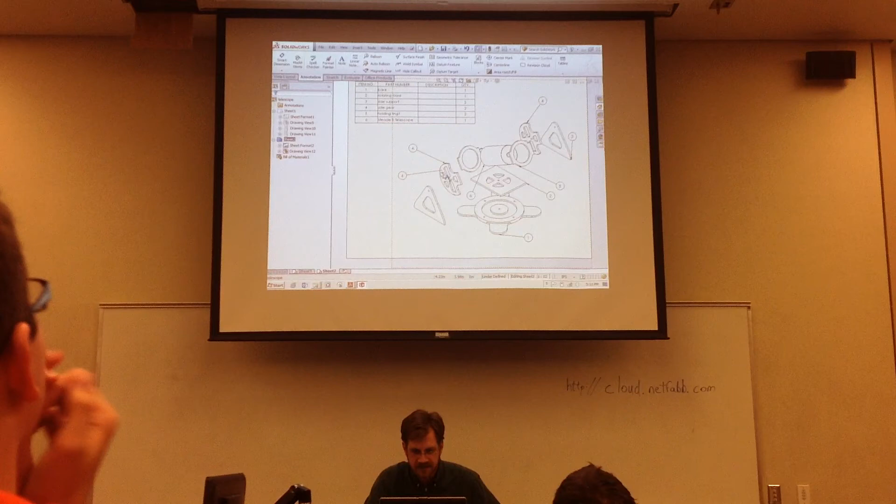And just to show you, again, how intelligent SolidWorks is being here, if I click on that side plate balloon, okay, that identifies it as the side support part. If I click on the arrow and drag it over here to a different part, notice that the number automatically updates to tell me, no, this part is the side gear part. Okay? If I drag it out here just into space, it gives me a question mark because it doesn't know what that is. But SolidWorks is actually pretty intelligent at laying these things out.

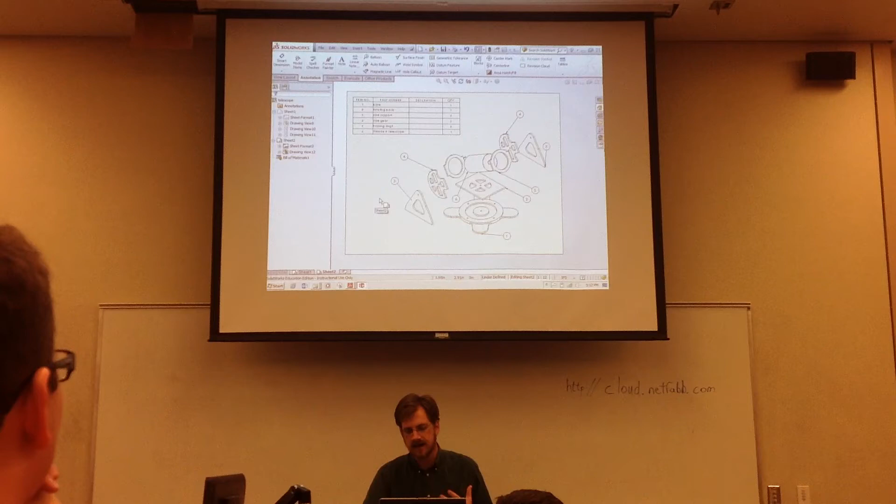And in AutoCAD, we'd actually be drawing the circle, putting the number in it, drawing an arrow, and then if we realized we needed a different configuration of the model, we'd have to start completely over. I don't mean to bash AutoCAD, because it's got its function, but so much happens automatically in SolidWorks that you would spend hours doing in AutoCAD. I really hope that you can appreciate SolidWorks functionality that you wouldn't have in some other programs.

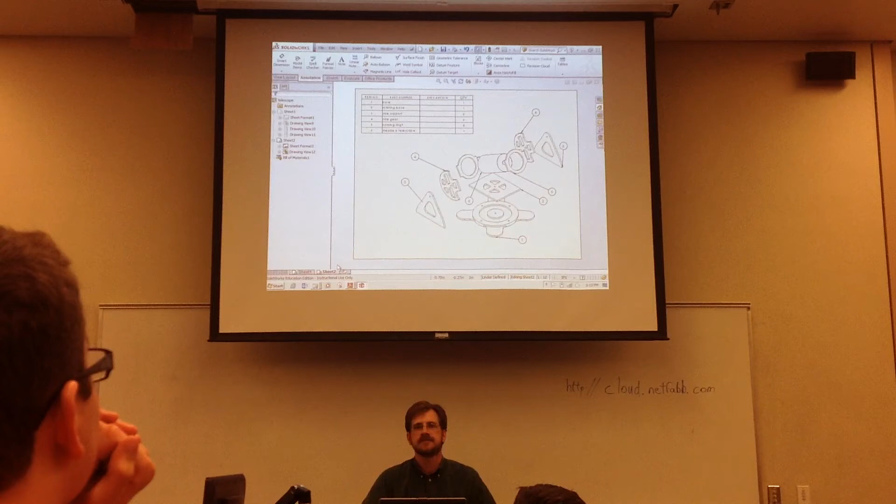What sheet type is this that we're using? This, if we look at the drawing, this is a size A landscape, ANSI landscape. Okay, so let's take a look at sheet 3 here and make sure you know what you need to for sheet 3. Again, we'll go add a new sheet, turn on the title block, properties, display sheet format.

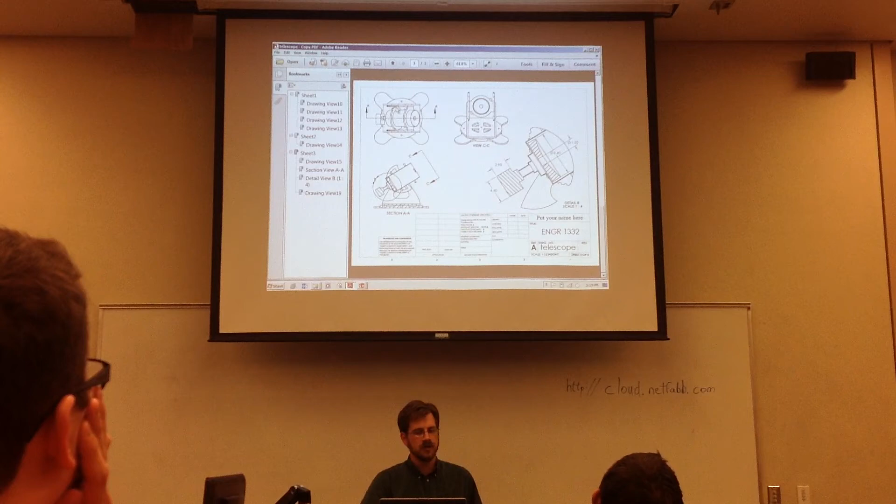Okay, now this view in the upper left, this is kind of your parent view for the other views, okay? Because you're taking a section view through it, that's what generates this view. Then an auxiliary view of this view gives you this one, and a detailed view gives you this one. So this is the parent view of all of your other views, and this is just a top view of the assembly.

So if we put a top view in, we go to View Layout, Model View, we can choose Top View and place that there. Okay, but notice that it's oriented in the wrong direction.

Also doesn't look like it used the sheet scale, which is strange. Use sheet scale. You can do a two-dimensional rotate. You wouldn't want to do a three-dimensional rotate because you'd never get it aligned perfectly. But you can do a two-dimensional rotate here using the Rotate View button and choose the view. And then we just want to rotate this one by 90 degrees so that it's facing off to the side instead of facing downward. Okay?

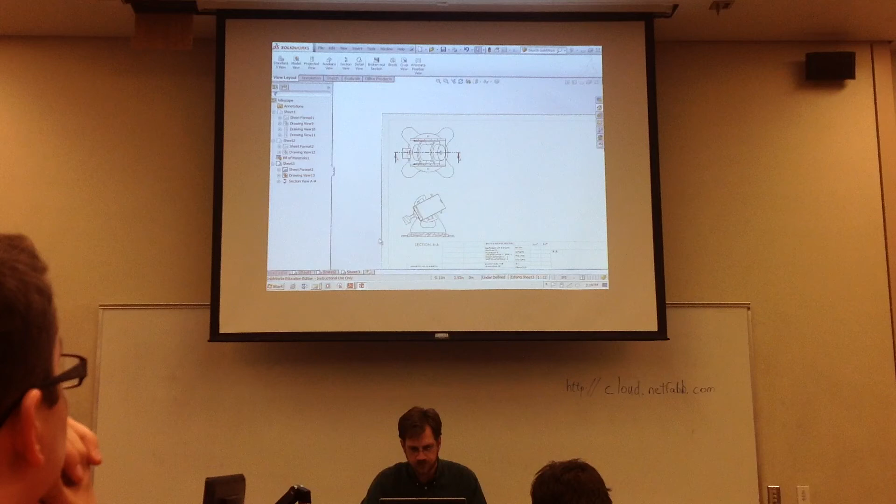And then we can do a section view. We'll do a horizontal view, section view right through the middle. Place that view down there, and it gets labeled for us. It gets crosshatched automatically for us. We can do the detail view, just defining a circle, something like that. And, oops. And then place that over there.

Remember how to change the scale. If we want this 1 to 4, just click on the view, go down to where its scale is defined, and choose whatever scale you want. And if the scale that you want is not listed, remember you can always go to user defined and type in any numbers that you want to. Okay, so then we need an auxiliary view.

So last time we talked about this, we didn't have a good example of why you would use an auxiliary view, but this is a perfect example. If you wanted to create a view that looks straight down the bore of the telescope, okay, there's no other view option that would really do that for you other than auxiliary view. Okay, none of your projected views would give you the correct view, but if you do an auxiliary view, you can select a reference edge.

I'll click on the front edge of the telescope, and then SOLIDWORKS gives me the view looking straight down the bore of the telescope. Okay, now SOLIDWORKS is maintaining the alignment, so I can't drag this up and down. What we need to do is just right-click on the view and say Alignment, go to Break Alignment, and that breaks the alignment so that I can drag this anywhere I want on the screen or on the page.

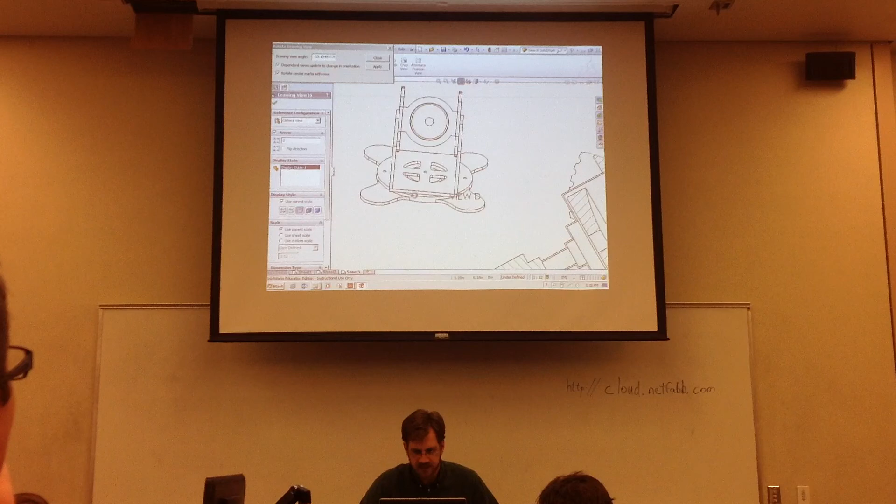Now again, this one is rotated. You'll want to click on it and do the two-dimensional rotate and just kind of drag it around. It's a little bit jumpy, but just play with it a few minutes and you should be able to get something that's pretty much vertical. All that good.

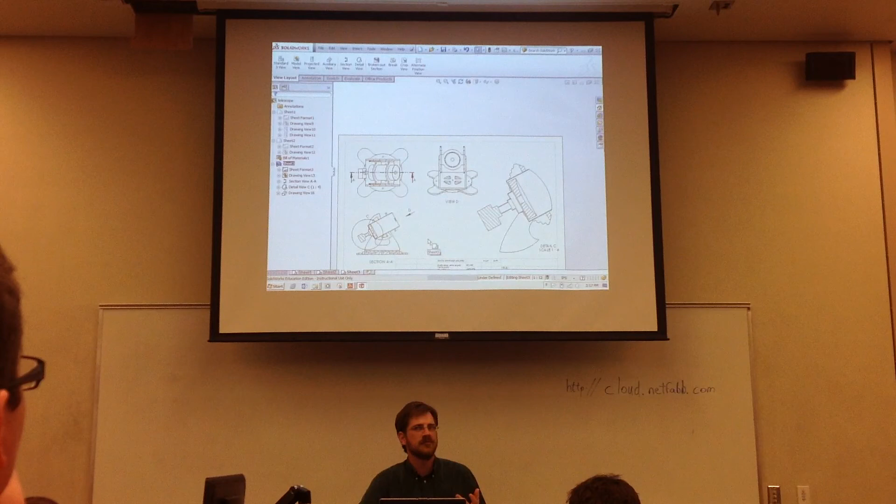And remember, if you notice that, for example, your section arrows or your dimensions are different than what's shown in the PDF, like this has the double arrow in the drawing. By default, I'm just getting a single arrow. Remember what is controlling the appearance of dimensions and the section arrows and stuff like that? Do you remember what that was called? That was the drafting standard.

Okay. So to change that, go to the Options button up at the top, Document Properties, change it from ISO to ANSI, and that changes the appearance of those things. You'll fill in your name in the title block. You'll add some dimensions there. Let's see. Oh, the center mark. I didn't put that in this view anyway.

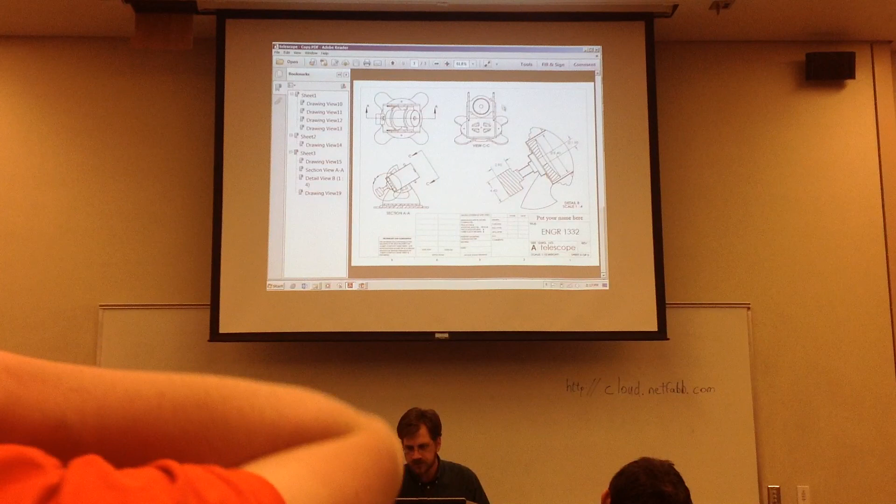But also, just remember, if you wanted the center mark here on this circular opening of the telescope, that's on the Annotations tab, center mark. Click on something circular, and that gives you the center mark to designate the center point of the telescope bore.

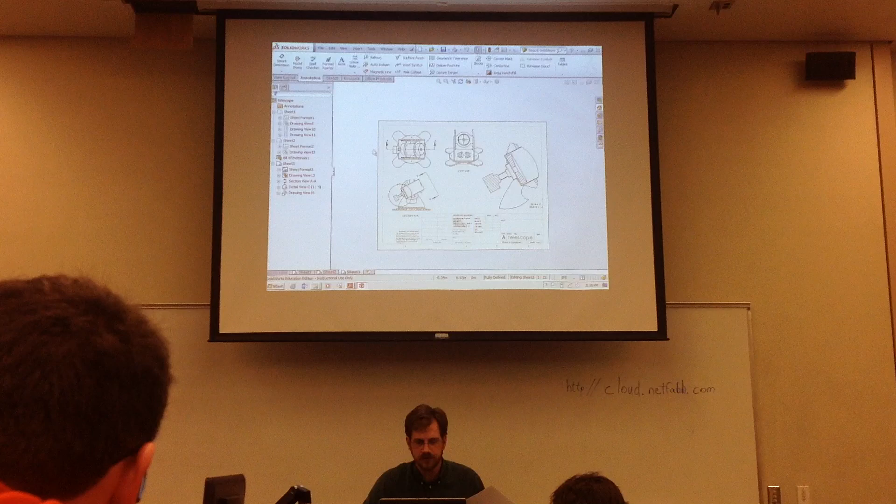Okay, so remember you can go to File, Save As, and sheets need updating. And you can change that to a PDF to turn it in. Also though, remember to save the drawing as a SOLIDWORKS file. If you need to come back and edit it later, remember to go and do Pack and Go.

Okay, because that will save your drawing and the assembly and all the parts that go into it, and you can save it in one single zip file, or just save all the stuff in one folder if you want. That way you've got everything you need to open this up on a different computer later on.

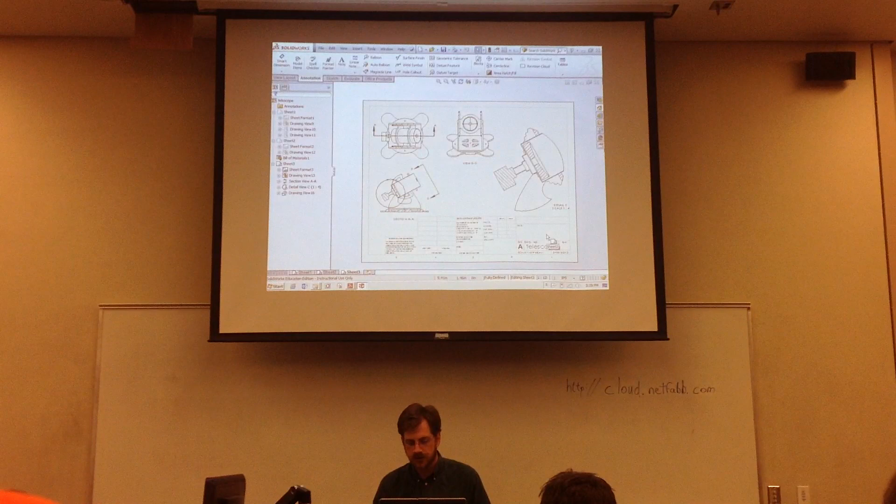So, do you have any questions at all over anything that we went through today? Okay, if there's no questions, go ahead and go to the second half of the lab, and if you have any questions, I'll stick around up here if you need.